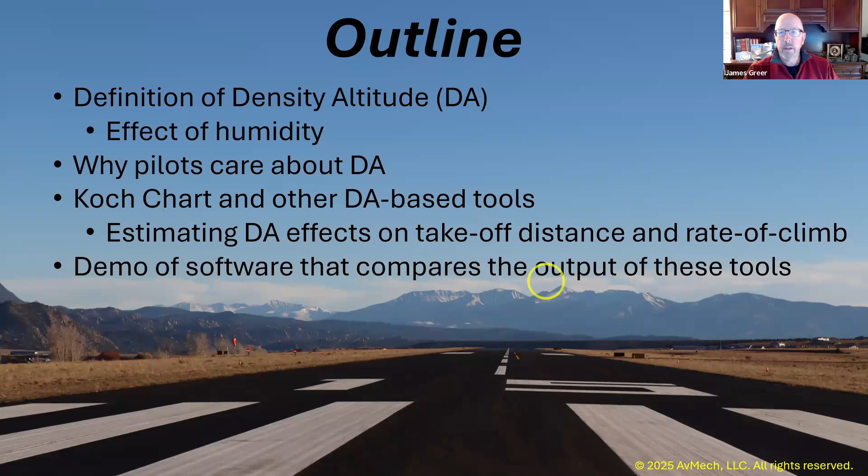So first, a quick review of the types of altitude that you learned when you were studying for your private pilot license. True altitude is your actual altitude above mean sea level. And if you're parked at the airport, it's going to be the airport elevation, provided, of course, that you're parked at the location where they measured the airport elevation. Where I fly, it slopes quite a bit from one end of the airport to the other. So your true altitude might not be airport elevation depending on where you're parked.

The next altitude I want to talk about: if you correct true altitude for non-standard pressure, you can calculate your pressure altitude. The easy way to do this is to just set your altimeter to 29.92 and read it, and that's your pressure altitude. But if you're not in an airplane with an altimeter, you can use this chart the FAA publishes in their Pilot's Handbook of Aeronautical Knowledge, and it'll give you the corrections to get pressure altitude from true altitude.

Most of you probably know that the pressure altitude changes about 1,000 feet for each inch of mercury of altimeter setting. But what we're really interested in finding is the density altitude. And that's what you get when you correct the pressure altitude for non-standard temperature.

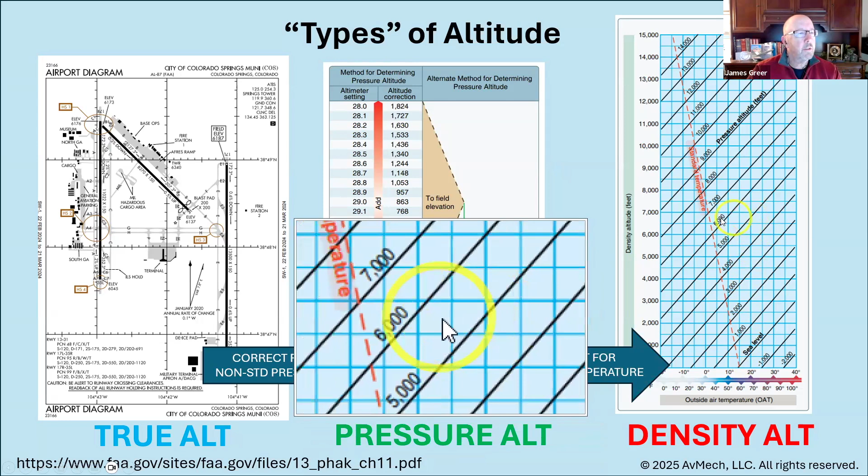And you've probably seen this chart before, but it's also in the Pilot's Handbook of Aeronautical Knowledge. You find your pressure altitude, and then there's this scale at the bottom of this chart of temperature. You find your temperature, your outside temperature, go up to the pressure altitude that you've calculated, and then over to the left axis of this chart and read your density altitude.

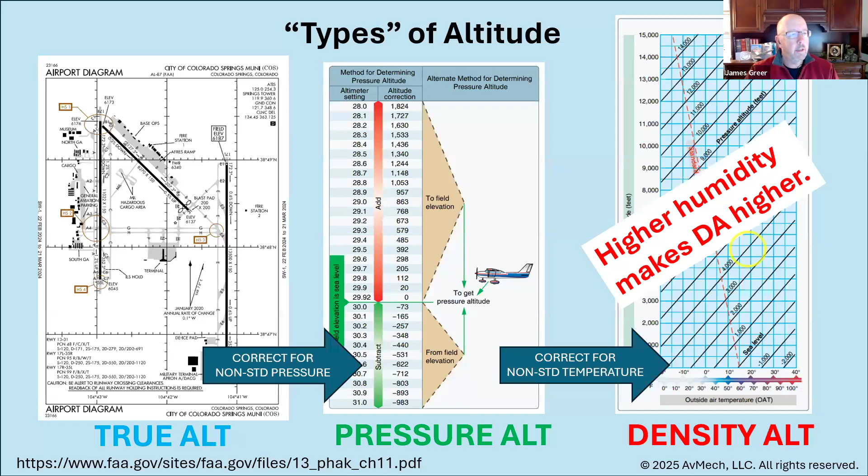Humidity also plays an effect, although this chart doesn't account for that. But higher humidity does make your density altitude higher. The Pilot's Handbook says there's no rule of thumb or chart for calculating the effect of humidity, but that you need to take it into consideration. It says to expect a decrease in overall performance in high humidity.

And while the Handbook of Aeronautical Knowledge says there's no rule of thumb for assessing humidity, there actually is. A couple of guys at Embry-Riddle Aeronautical University in Daytona Beach published a paper back in 2016 where they came up with a simple correction for humidity. It's 20 feet of altitude for every degree C of dew point temperature. So if you're at 20 degrees C dew point, then you'd add 400 feet to your density altitude. So you can see it's not a huge effect, but it's not insignificant.

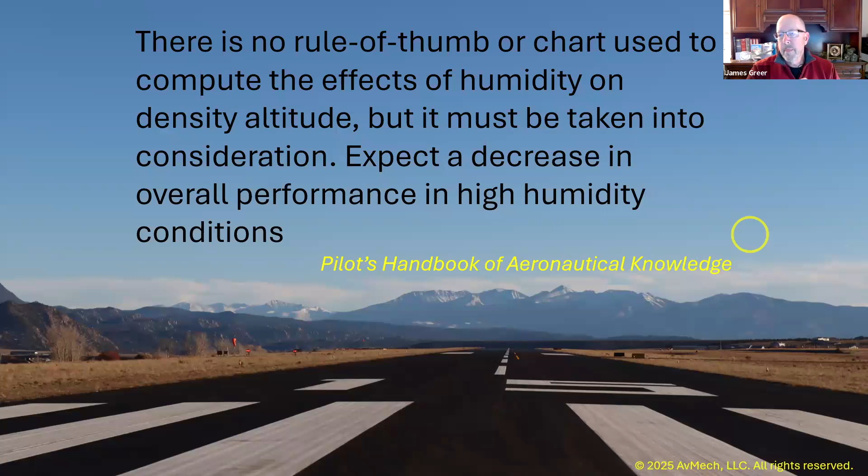But most charts that you use, and if you use your E6B computer, you won't have a humidity correction in there. So this is a picture of the software I'm going to show you later tonight. One of the features of the software is if you plug in a station ID and click Get METAR, you can get this bar chart of the altitudes: true altitude, pressure altitude, dry density altitude, which is density altitude before you correct for humidity, and then the red bar is your density altitude.

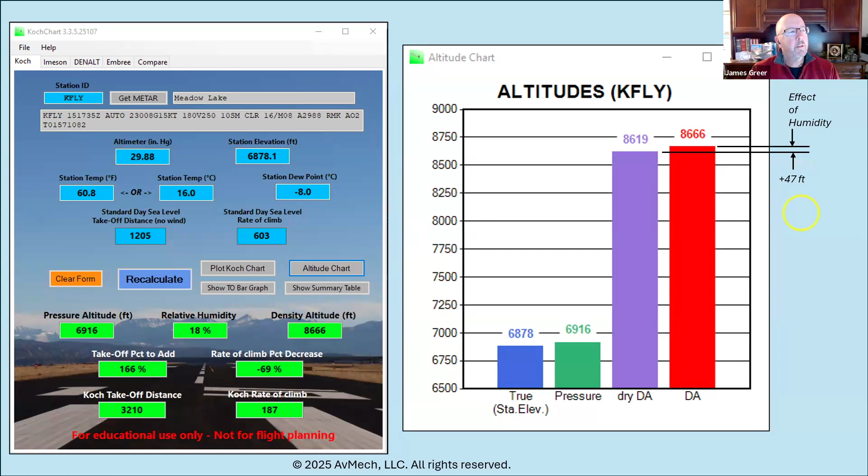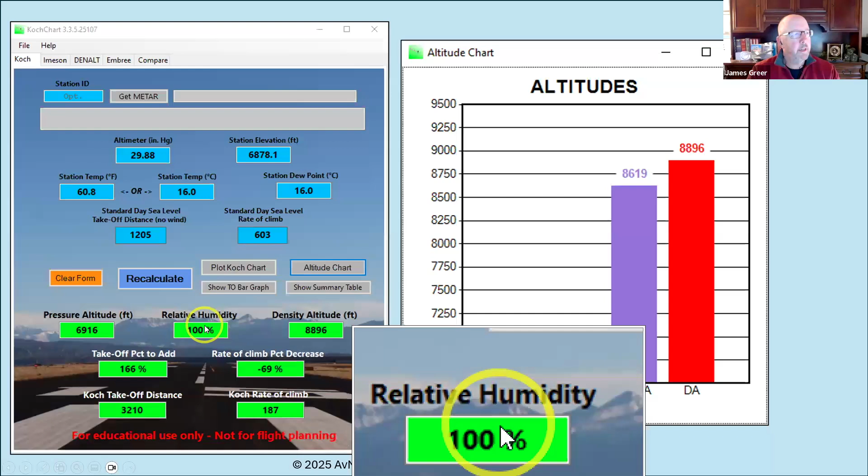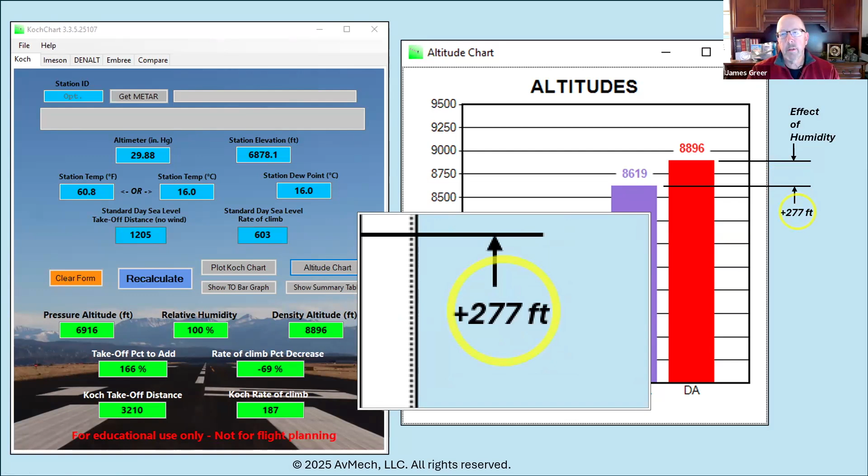And you can see in this case, this was from Meadow Lake Airport, and the humidity here was very low, 18%. And if you look up here to the right, you'll see that the effect of the humidity is only to add 47 feet to your density altitude. Not a huge difference. We can take this same scenario and crank up the dew point to get to 100% relative humidity, which you can see over here. And we can get the maximum effect of humidity for these conditions on the density altitude. And we see here that the effect of humidity is to add about 277 feet to our density altitude.

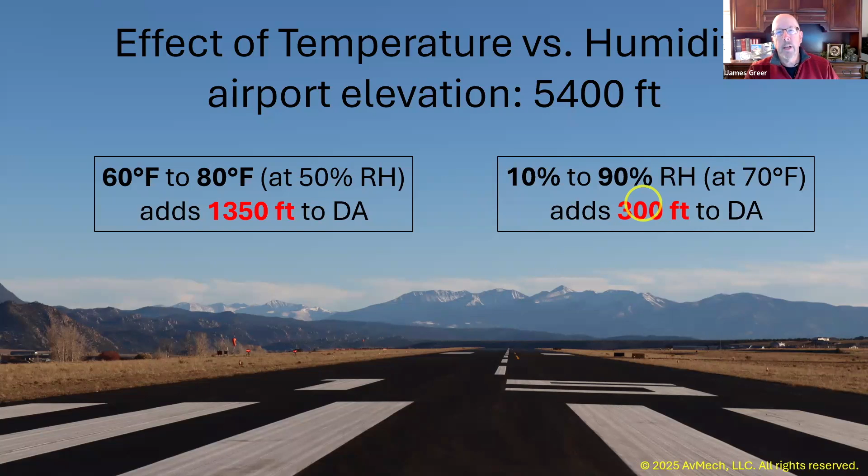And why do we care about density altitude? This again is from the Pilot's Handbook of Aeronautical Knowledge. Density altitude is the altitude the airplane thinks it's at in terms of performance. So regardless of your actual altitude, the aircraft is going to perform as though it were flying or trying to take off from the density altitude.

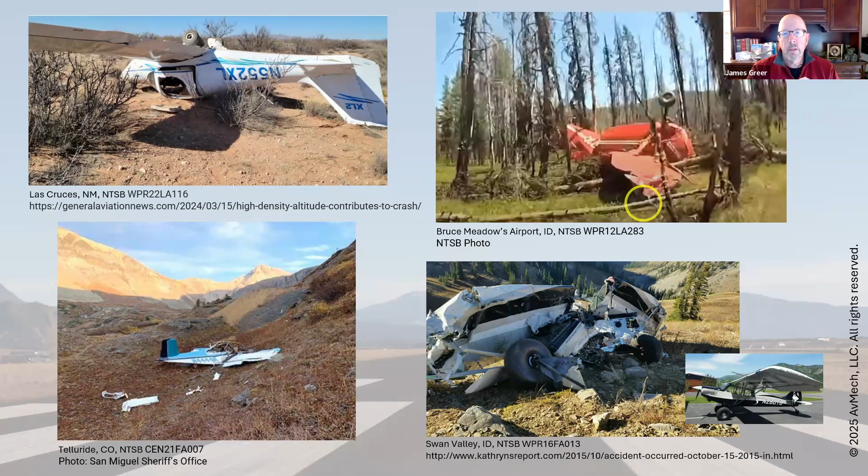And if you do a quick search online of density altitude related incidents and accidents, you'll find a lot of them. These are all cases where density altitude was cited as at least a contributing factor to the accident. Now with cameras and GoPros being everywhere, you can find films of some of these. The one in the upper right, the Bruce Meadow's crash, in which fortunately no one was killed, is a case where they were able to take off, but they just couldn't climb at their flight conditions.

So how do you calculate density altitude? Well, in ground school, you learn how to calculate it on your E6B whiz wheel computer. Of course, there are electronic E6Bs too. I know Sporty's has one, and there are probably others. You can use a formula to estimate it. This formula shown here says to get density altitude, first find your pressure altitude, and then add 120 feet times the difference between your outside air temperature and the standard outside air temperature for your pressure altitude.

So you can see if your outside air temperature is the same as your standard air temperature for your altitude, this whole term goes to zero, and your density altitude will equal your pressure altitude. Whereas if you have a difference in temperature, the higher your outside air temperature, for every degree centigrade higher, you're going to add 120 feet to your pressure altitude.

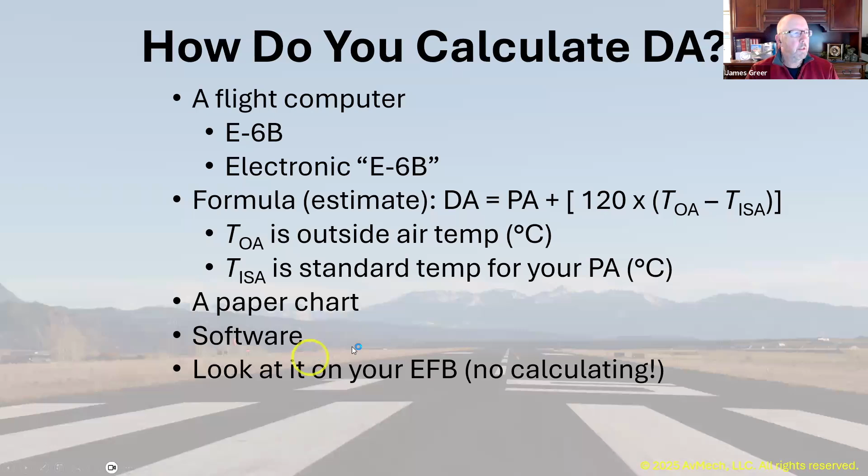You could also use paper charts. We looked at one that's in the Pilot's Handbook of Aeronautical Knowledge. You can use software like I'm going to show you in a few minutes, or you can just look at it in your electronic flight bag if you have something like ForeFlight. If you plug in an airport into ForeFlight, and I assume this is true for other electronic flight bags, although ForeFlight is what I have, it tells you the density altitude right on the screen there.

Okay, so these are the things, and this isn't an exhaustive list, but these are the things that density altitude affects. Some of them for the better, but most of them for the worse. The higher density altitude, the worse your takeoff distance, the worse your propeller is performing, your engine power is lower. Flight pilot physiology, of course, if your density altitude's high enough, you can experience hypoxia, for example.

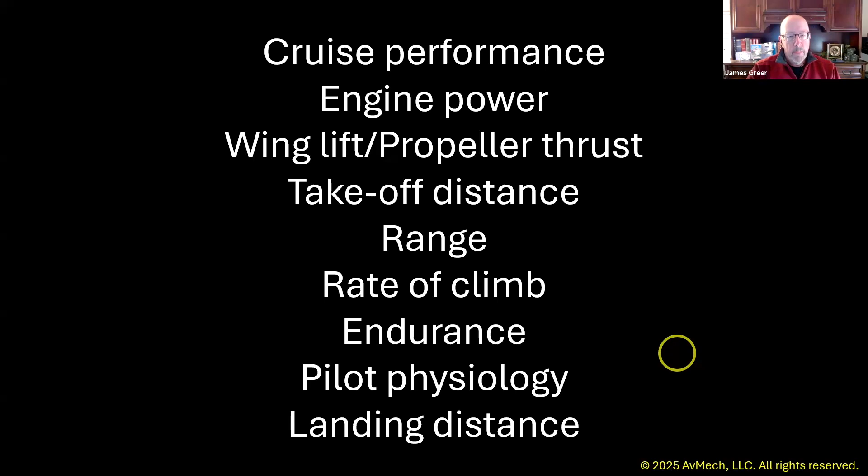But for the rest of this presentation, we're going to focus on two of density altitude's effects, and that's takeoff distance and rate of climb. And we'll start by looking at the Koch chart.

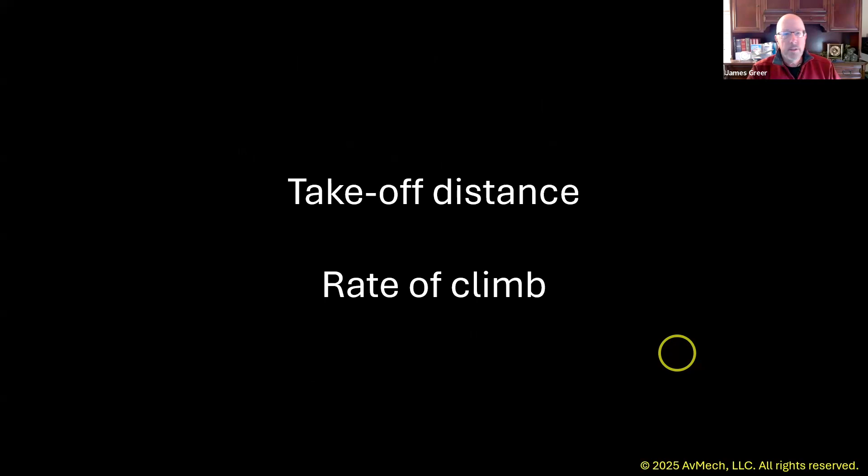The Koch chart is something you may have seen on the counter at your FBO. The FAA still cites it in this FAA pamphlet. It says if you don't have your flight manual or your POH, to use the Koch chart to calculate the approximate temperature and altitude adjustments for aircraft takeoff distance and rate of climb. And it's getting a little bit long in the tooth now. This is a 2008 publication, but it's still available on both the FAA and the NTSB's websites.

This is what the Koch chart looks like. It's called a nomograph. It's got three vertical axes on it, as you can see. And the way it works is you plot your outdoor air temperature, your station temperature in degrees Fahrenheit on the left axis. You put a point at your pressure altitude on the right axis. And again, you find your pressure altitude most easily by setting your altimeter to 29.92. And you connect those 2 points with a straight line. And where it crosses the third axis of the nomograph, that gives you the information we're looking for.

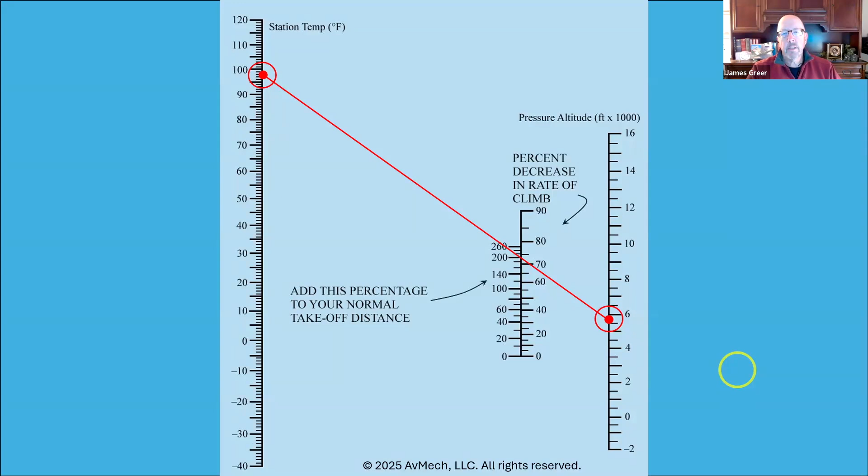It tells you how much distance to add to your normal takeoff distance, and normal means at your current aircraft weight under standard temperature and pressure conditions at sea level. And it also calculates the decrease in your rate of climb. So in this particular case, it's telling us to add 200% to our takeoff distance and to decrease our rate of climb by 73%.

So how did the Koch chart come up with these particular numbers? I'm not sure. What I've been able to dig up is the earliest Koch chart I found was in a 1950s Army helicopter flight manual. But another source I saw said it was developed in the 30s by Dr. Koch over in Germany.

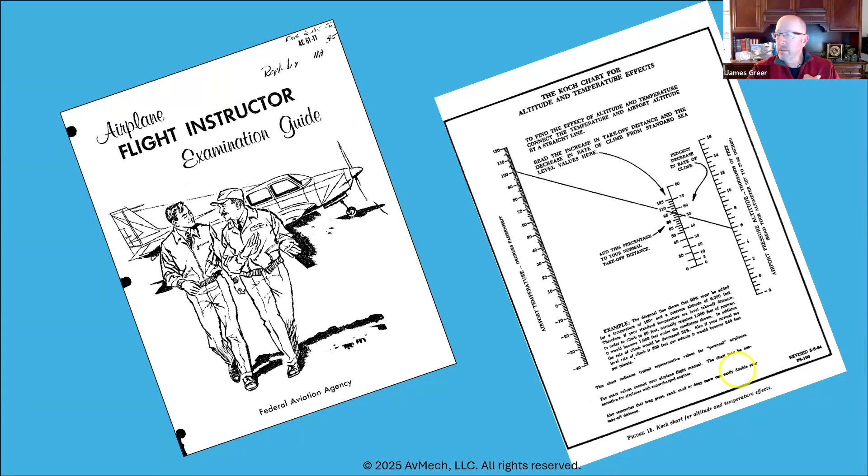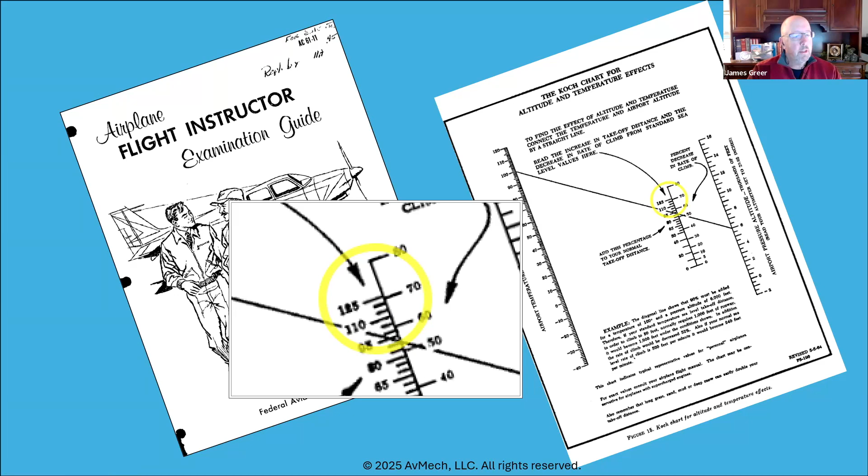Here's where it first appeared, at least where I first saw it in FAA publications. Back in 1964-65, they published the Koch chart in this flight instructor exam guide, and it's hard to read. I'm going to zoom in on it. Maybe you'll be able to see here, but you'll notice the top of the Koch chart here says add 125% to your takeoff distance. That's different than today's Koch chart, and in fact, they rescinded this one, and in 1967 published a revised one. And that's the one that's available today.

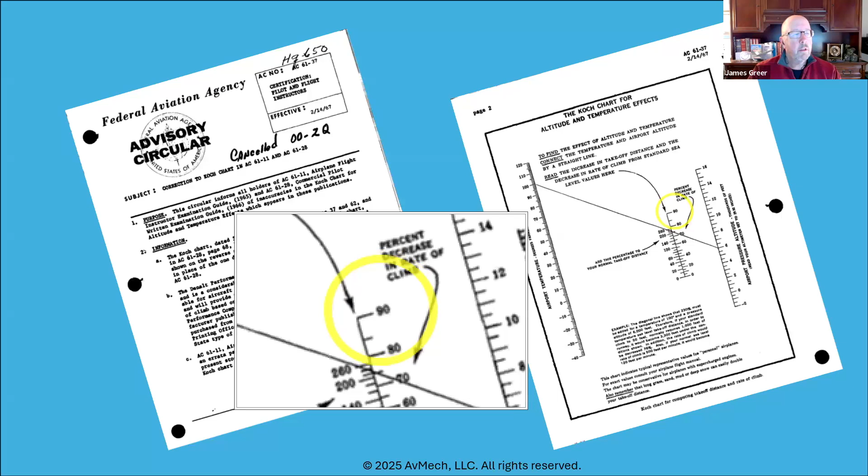It goes up to 260% addition to your takeoff run and 90% decrease in your climb rate. This one came out, like I said, in around 67. And if you find a Koch chart today, that's the one you'll see. So somebody decided in the late 60s that Dr. Koch's correction factors weren't conservative enough.

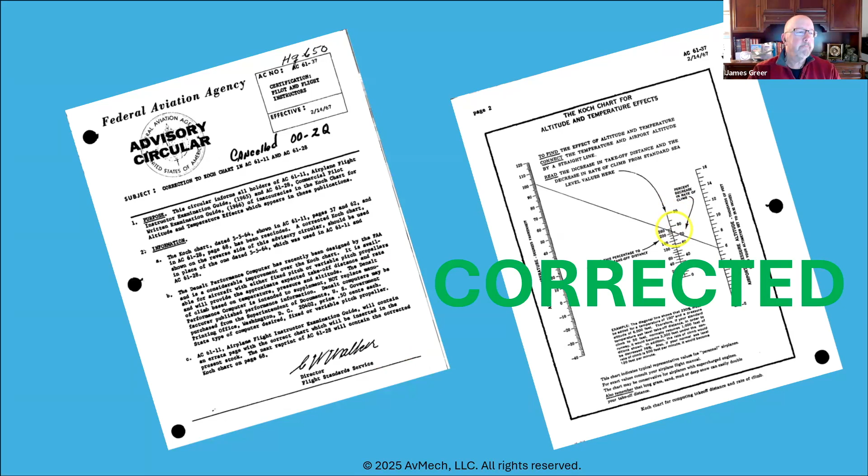At the same time the FAA published that revision, they also came out with this whiz-wheel computer called the Denalt computer. And Denalt is a contraction for density altitude. This version, as you can read on the rim of the computer, is for variable pitch propellers, but they also issued one for fixed pitch propellers. And there's a new version of this that's available today that I'll show you in a couple of slides. But this is another way to assess the effect of density altitude on your takeoff and rate of climb.

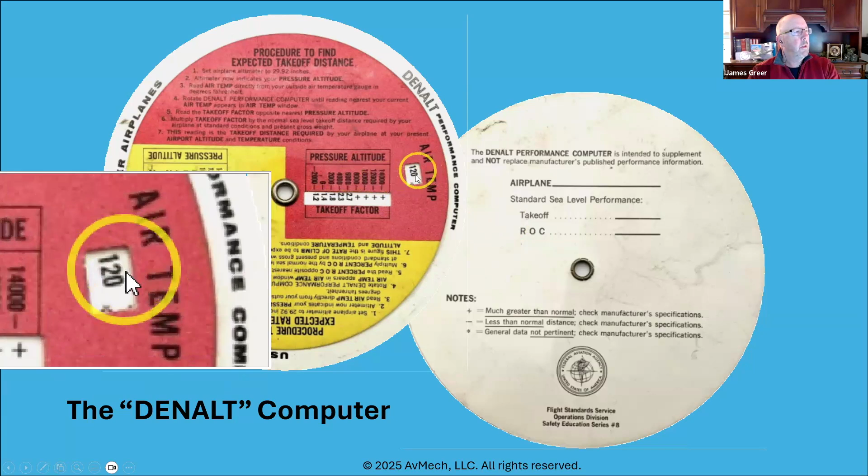And you can see up here is the pressure altitude window. Over here is the air temperature window. So you put your air temperature in this window. You look along here for your pressure altitude, and it says, for example, multiply your takeoff distance by 2.7 in this case.

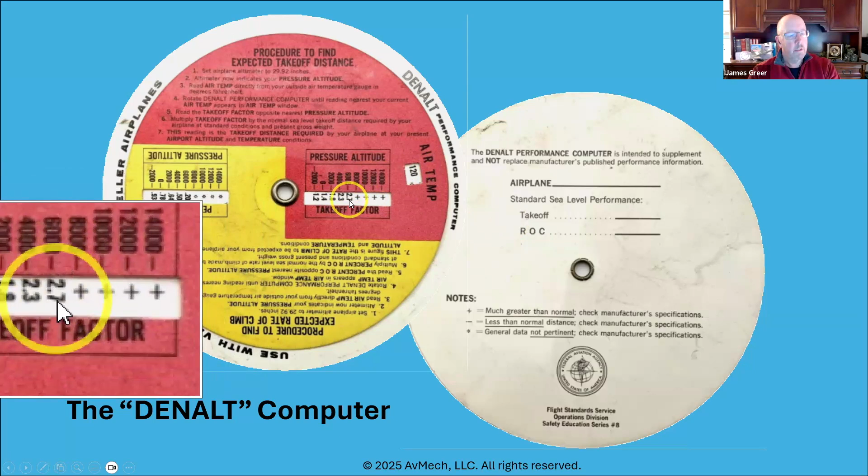So the Koch chart, it turns out, while it does show you what to add to your takeoff distance and percent decrease in rate of climb, my suspicion is it really started as a density altitude calculator. And let me show you what I mean by that.

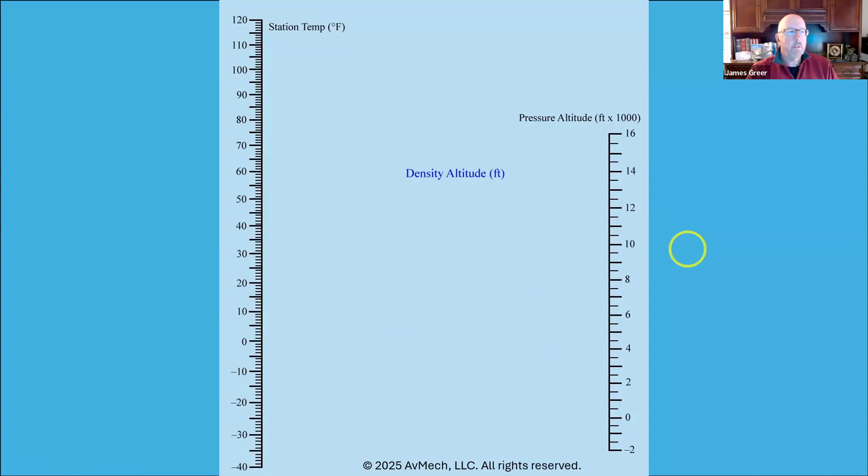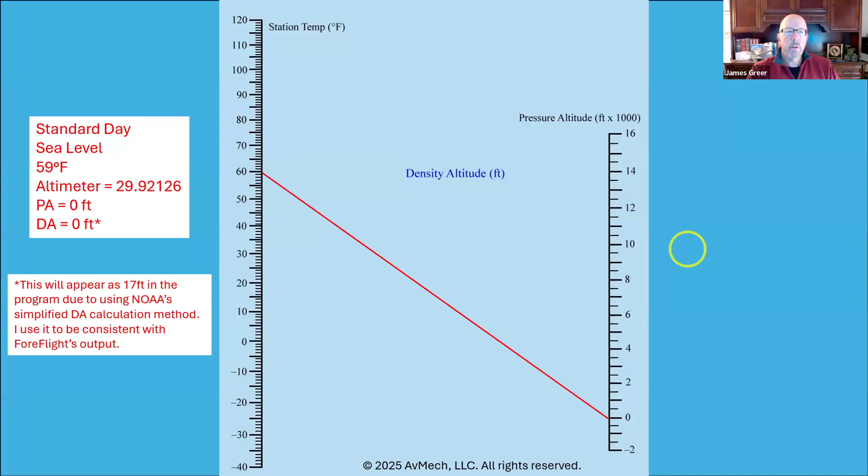If we pick conditions that result in zero density altitude, like standard day sea level, and put that on our chart, and then find another condition that also results in a zero density altitude, for example, a cold day in Wichita, when we see where those lines cross, we can add a scale on here and call that zero. And we can do that for a bunch of conditions and see where we end up as far as a density altitude scale.

And it turns out that if you, for example, here's Meadow Lake Airport on an 82-degree day with a certain altimeter setting, it gives you a 10,000 foot density altitude, and you can calculate that a number of ways,

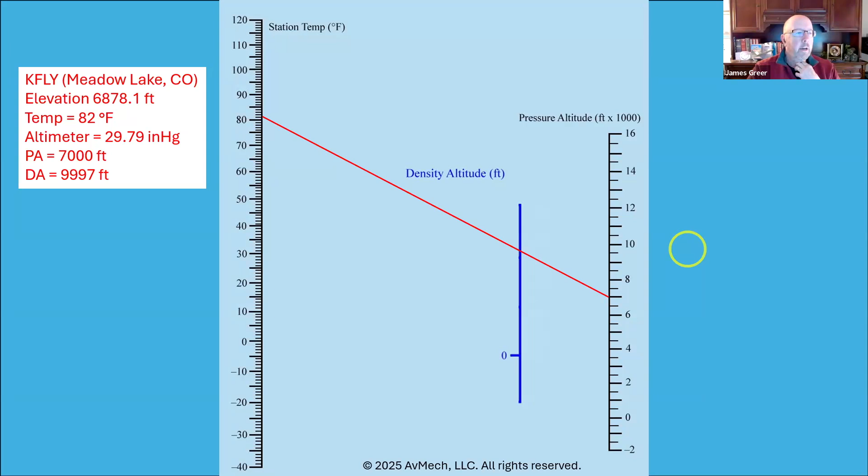Let's find another place with a 10,000 foot density altitude. Here's a cool day in Lake County Airport in Leadville, Colorado, 27 degrees. Their airport elevation is almost 10,000 feet, the highest airport in North America, as far as I know. We can put another tick mark there and call that 10,000.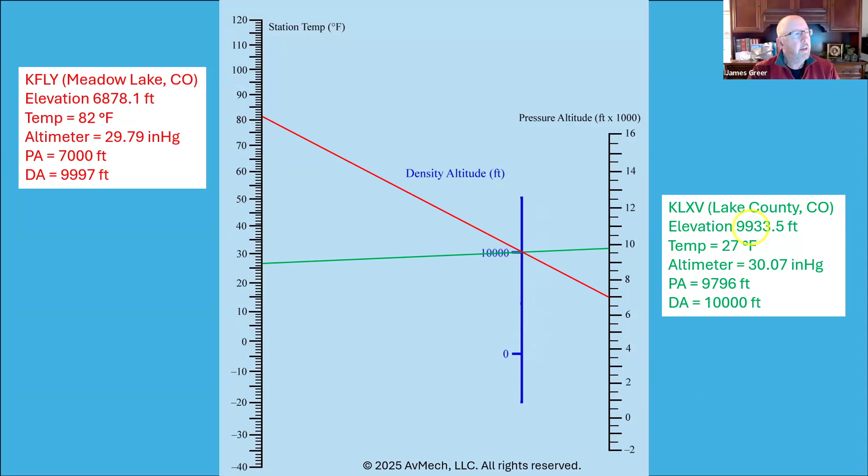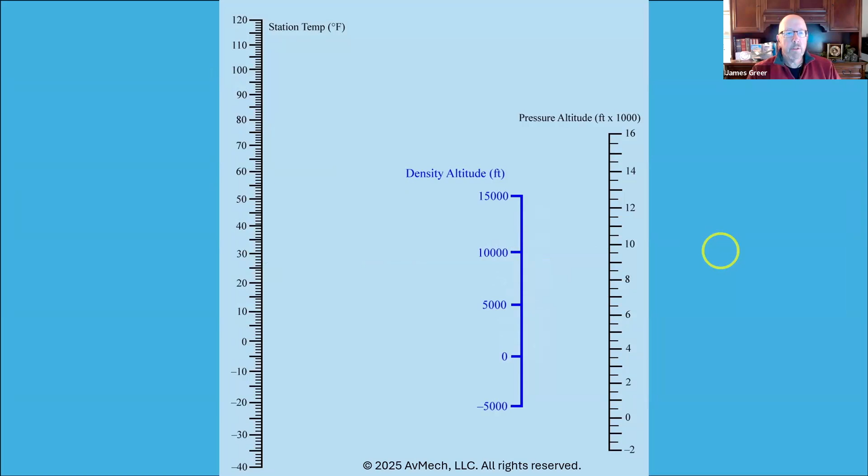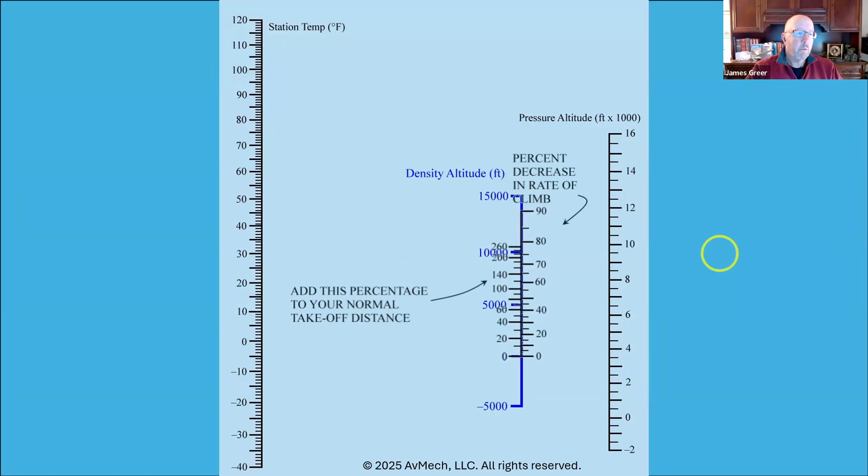And if you do this enough times, you figure out that this scale actually is a very linear, evenly spaced density altitude scale. So what this nomograph is doing in the background is calculating your density altitude, and what Dr. Koch did and what the FAA later revised was to try to put numbers on there that connect the density altitude to the effect on your takeoff distance and rate of climb.

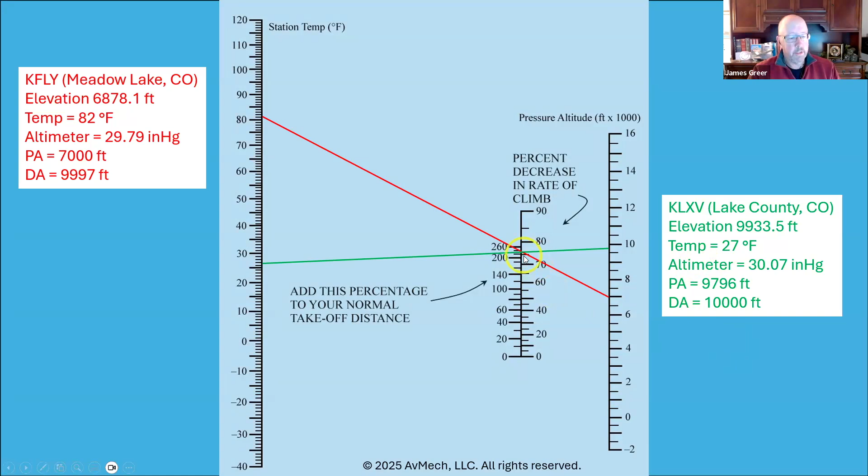So these are the conditions I showed before for 10,000 foot density altitude. You can see the chart is telling us to add somewhere between 230 and 240% to our takeoff roll, and to decrease our rate of climb by something a little over 75%. And those numbers you can see here.

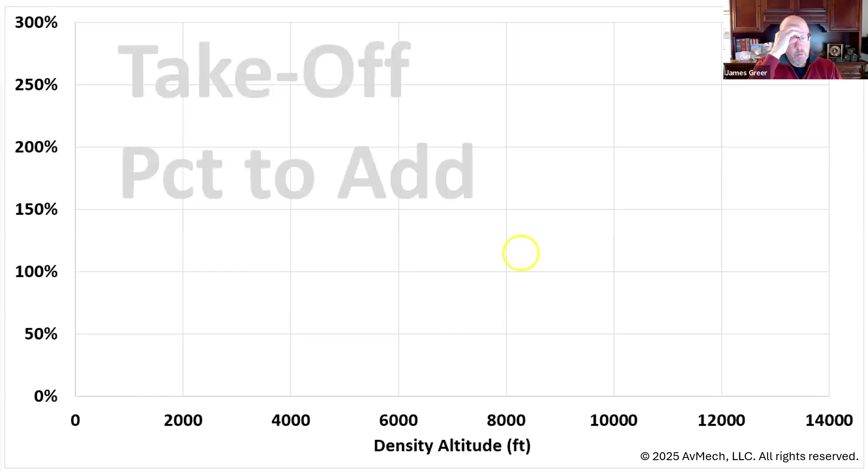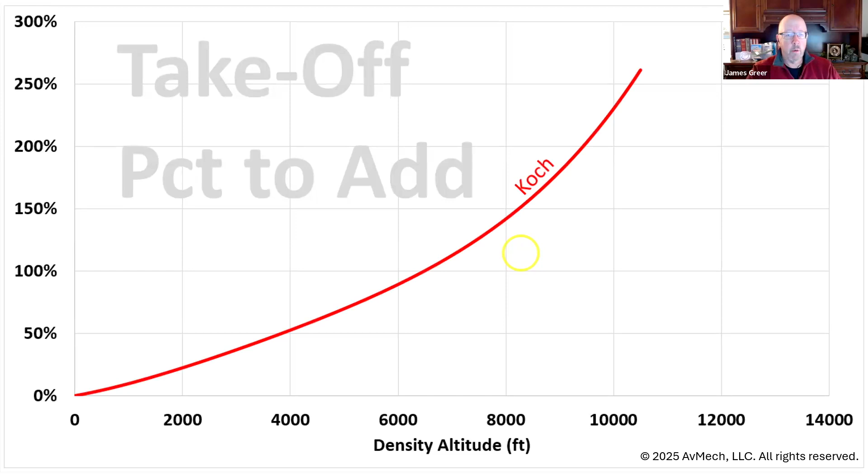What we can do is take those numbers off Koch's chart and plot them against density altitude, and we get a curve that looks like this. This is how much you're supposed to add to your takeoff distance for a given density altitude. But as I mentioned before, the Koch chart is not the only way people have estimated the effect of density altitude.

So let's look at 3 other methods that have been used to estimate the effect of density altitude on takeoff and rate of climb. You may have heard of Sparky Imeson. He wrote a book called The Mountain Flying Bible, and in that book he has some rules of thumb for the impact of density altitude on your takeoff performance.

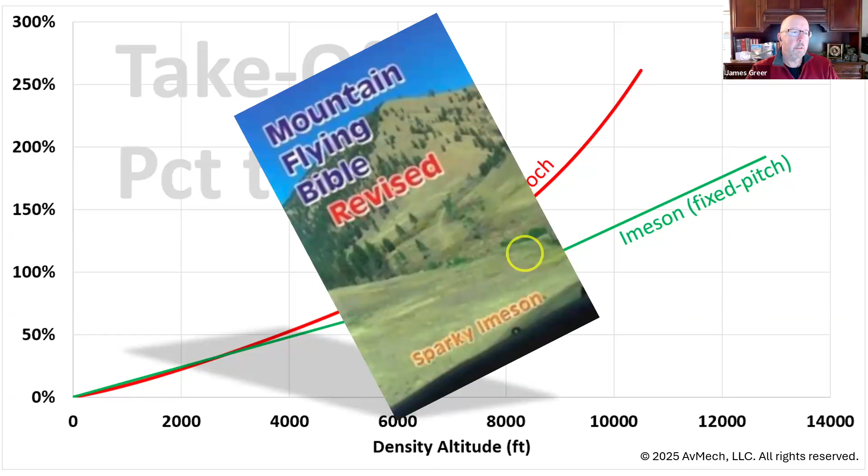This green line represents his rule of thumb, which is to add 12% to your takeoff roll for every 1,000 feet of density altitude. And then once you get past 8,000 feet of density altitude, you add 20% to your takeoff roll for every 1,000 feet. And that's why there's a bend in this line right here at 8,000. You can see it's not quite as conservative as the Koch chart would be. The Koch chart penalizes you more than the Imeson rule of thumb.

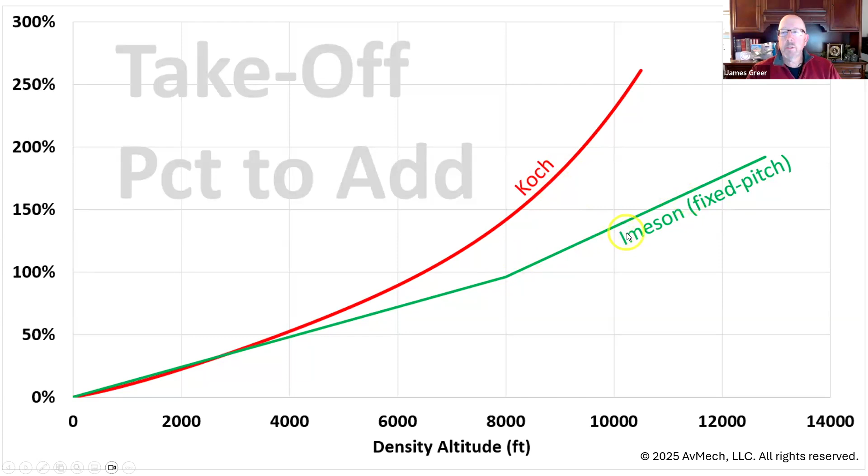And Imeson had rules for both fixed pitch propeller airplanes and variable pitch propeller airplanes. And I should say that this is all normally aspirated airplanes, not turbocharged airplanes. You'll notice that for a variable pitch propeller or a constant speed prop, the penalty's not as bad. That's because with a variable pitch prop, obviously you can change the pitch to take a bigger bite out of the thinner air, and it doesn't suffer as much as a fixed pitch propeller airplane does from the increase in density altitude.

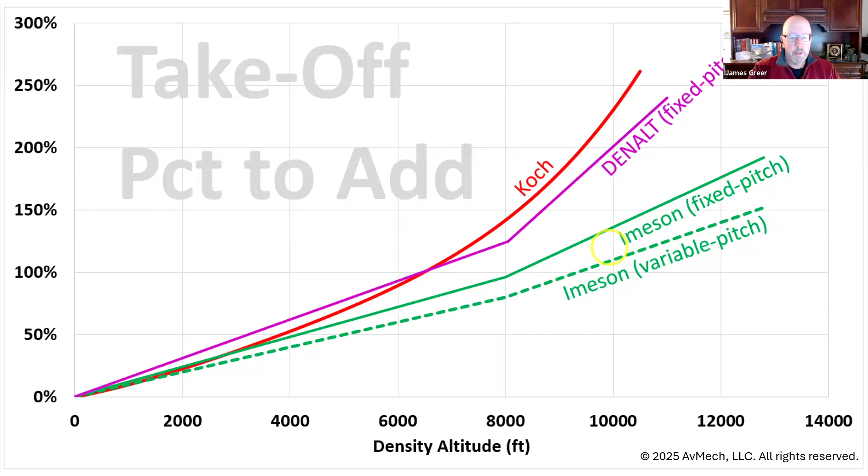This purple line is taking all the points off the Denalt computer that I showed you earlier and plotting a curve based on those points. This is what the more modern version of that computer looks like. It has scales for both variable pitch propellers and fixed pitch propeller airplanes on the same device. This one happened to be made in 1991 by a contractor in California. So at some point, the FAA handed this computer off to somebody else.

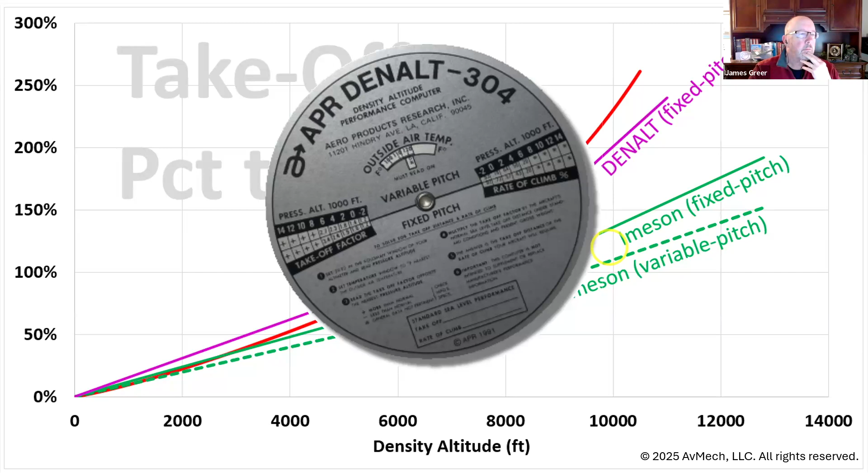And like with Imeson, Denalt has the variable pitch curve as well. And as you can see, once again, the variable pitch propeller airplane is not as badly affected as the fixed pitch propeller plane. And the Denalt computer gives you more conservative effects than Imeson's rules of thumb, but less, except at lower altitudes, than the Koch chart does.

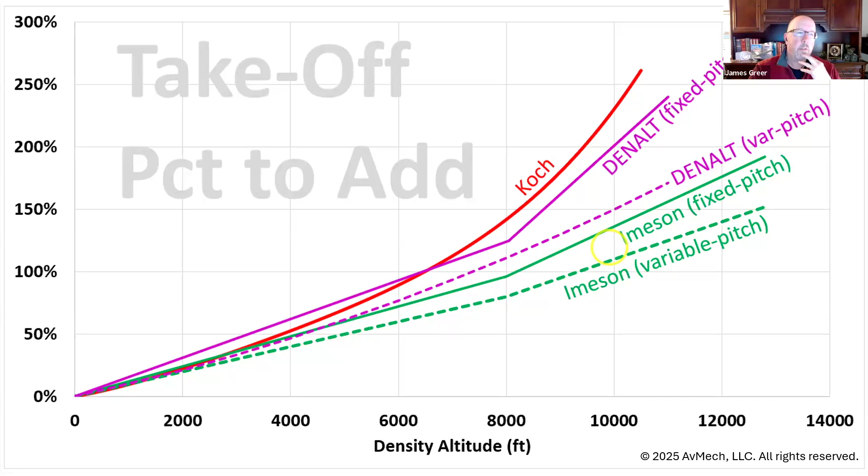And finally, James Embree wrote a book in 1984 called Axioms of Flight. In that book, he came up with a whole bunch of rules of thumb for many things beyond takeoff and rate of climb, but he does have rules of thumb in there for takeoff and rate of climb. This orange line here is for the fixed pitch propeller airplanes, and this dotted line for variable pitch propeller airplanes. And you can see they kind of fall in the same neighborhood as the Denalt estimates do.

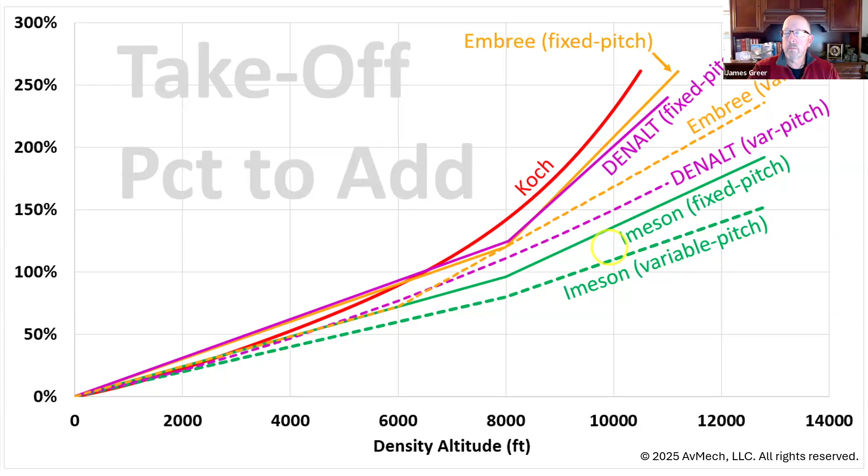So these are all rules of thumb and estimates. Let's compare them to some actual flight manual data. I'll throw on there some data from a Cessna 172 handbook. And if we isolate those points against the Imeson fixed pitch, because this is a fixed pitch propeller airplane, we see that it matches pretty well to the Imeson curve.

We can throw on these magenta circles for the Piper Cherokee Warrior 2. And we see that they happen to match the Denalt and the Embree curves. It makes me wonder if maybe Piper, for the purposes of their manual, used an analytical solution rather than a flight test, because those points are just perfectly on that 15% slope line.

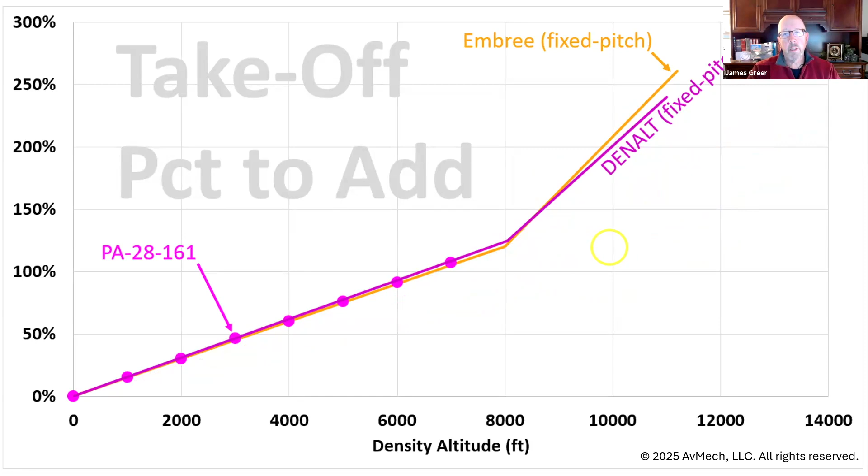And finally, let's add some data points from a variable pitch propeller airplane. These blue triangles are for the Cessna 182. And they match the Imeson variable pitch pretty well.

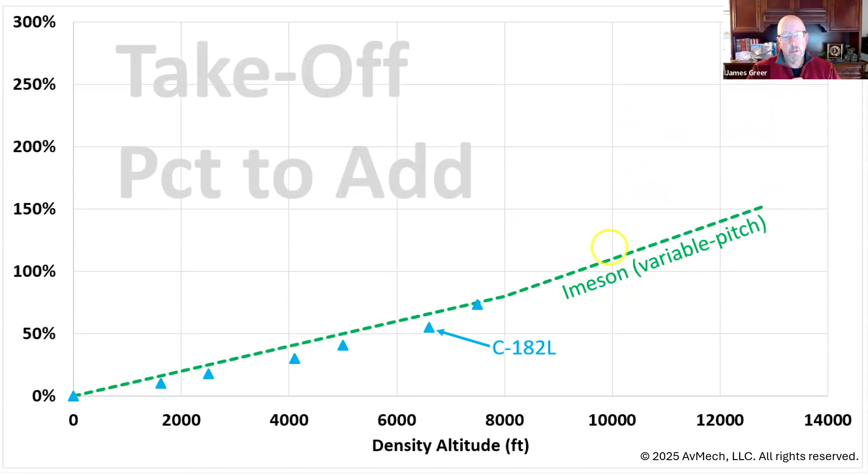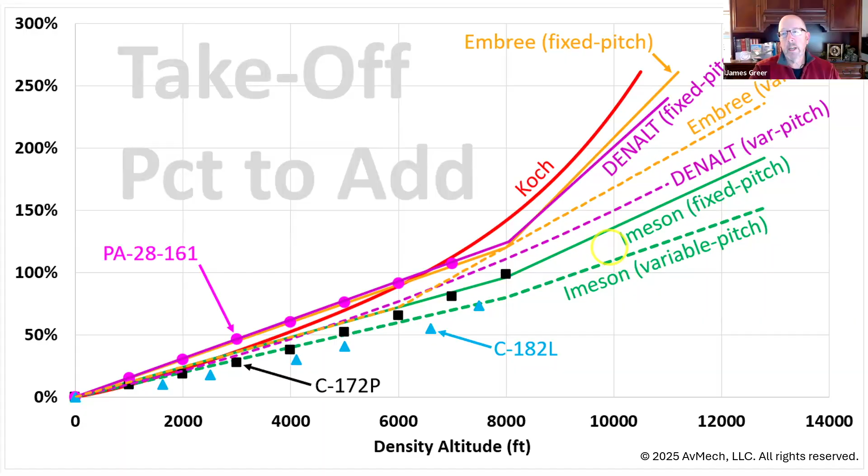And I suspect that most of these rules of thumb, the way these different authors and sources came up with them, had a lot to do with the airplanes they were flying at the time, because they're all a little bit different, except for Denalt and the Embree fixed pitch curve. They don't fall on top of each other very well. But these are 4 of the tools that people have used to try to get a handle on the impact of increasing density altitude on your takeoff and rate of climb performance.

We didn't talk much about rate of climb, and I'm not going to go into the same level of detail here, but I will show you what those curves look like. Here's how Koch says density altitude affects your rate of climb. At least I should caveat that and say it's Koch as revised by the FAA in the late 60s. Embree and Imeson both use the same rule of thumb for their effects for both fixed pitch and variable pitch propeller aircraft.

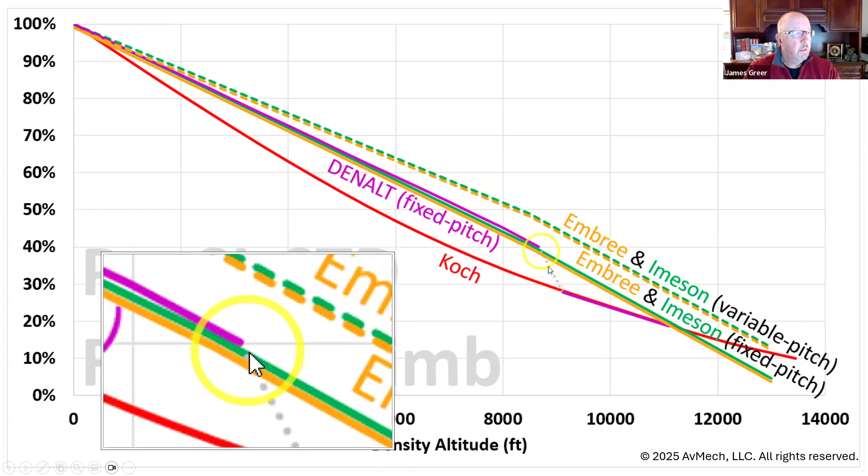Denalt follows the Embree and Imeson line until about 8,500 feet. And then if you plot all the points that are available on that flight computer, there's this kind of strange gap right here where these gray dotted lines are. I guess the authors of that device decided that once you get above about 8,500 feet, you really need to take a bigger penalty on rate of climb. So it jumps down to something like the Koch curve here.

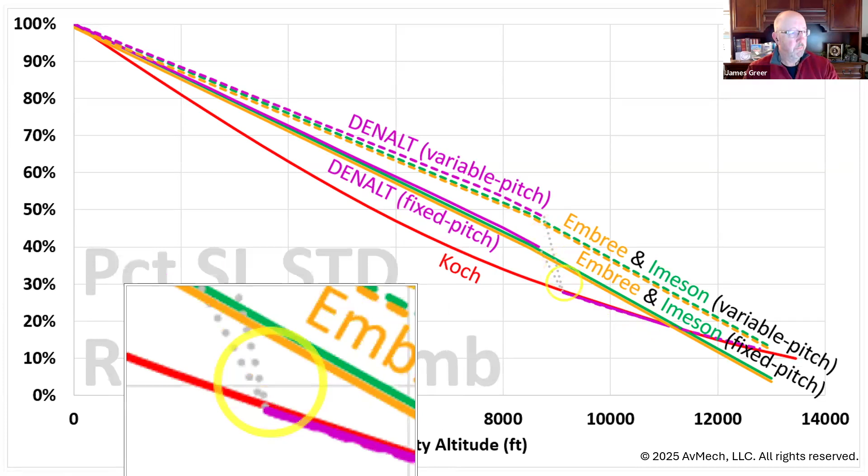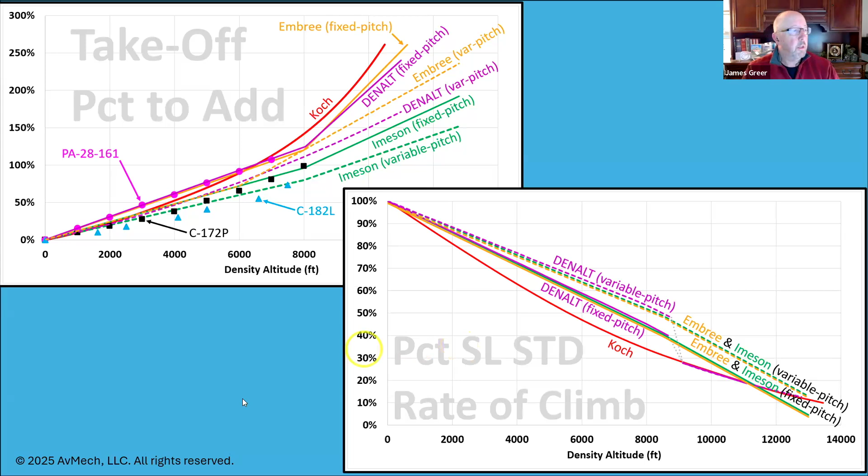And that's true for the variable pitch propeller case as well. You can see there's this jump here in the line as you pass through about 8,500 feet. So that's the effect of density altitude on rate of climb by these 4 different sources. These are just both of those charts on the same page, and they're available in the software I'm about to show you. And I'm going to get to that next.

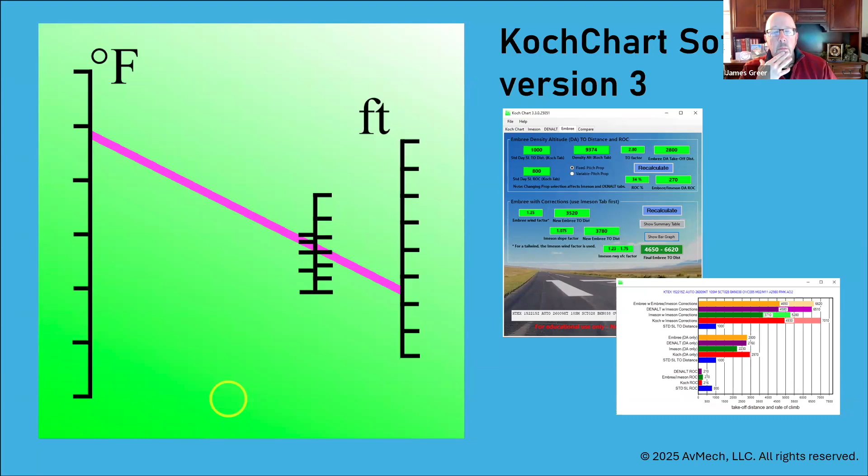But before I pull up the software, I would like to just give you a little preview of some of the things you're going to see in it that might be hard to see in the actual demo.

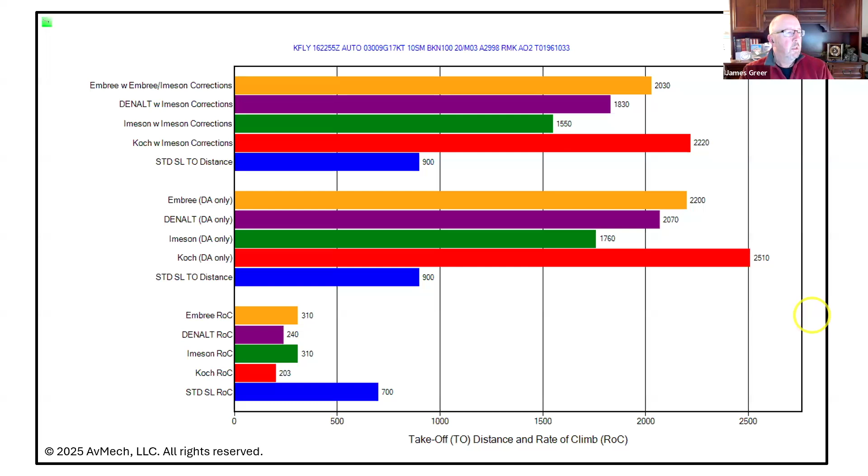So this is what the software interface looks like, and it pops out a Koch chart really quick once you put in your airport identification. And this is a bar chart that it will show you. At the bottom of the bar chart is the rate of climb performance. At the very bottom, the blue bar is what you put in for your standard day sea level performance. And then the other colored bars are the rules of thumb and the Koch chart application based on the density altitude. So you can see in this case, a 700-foot rate of climb at sea level becomes 310 according to the Embree rules.

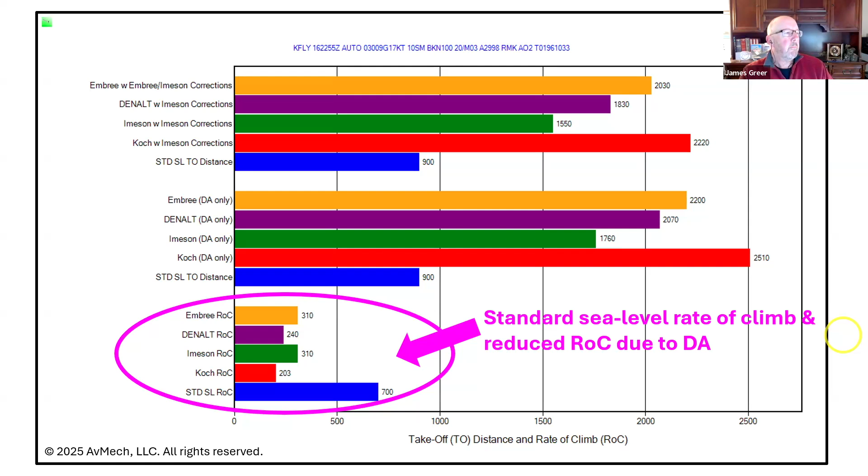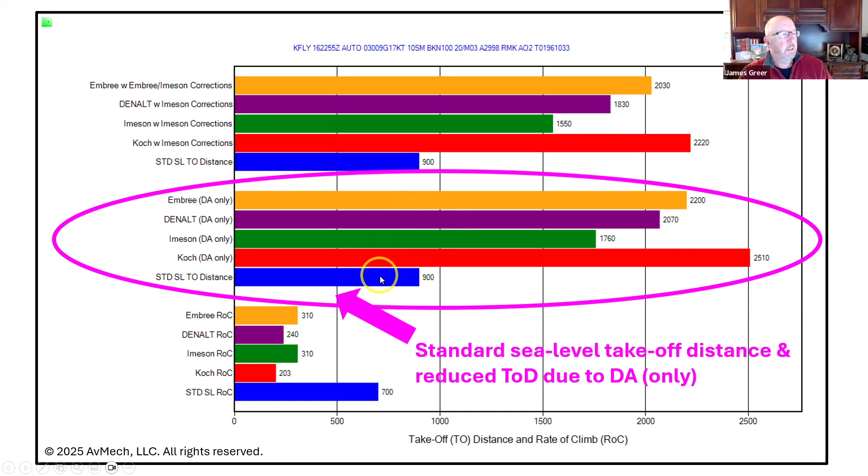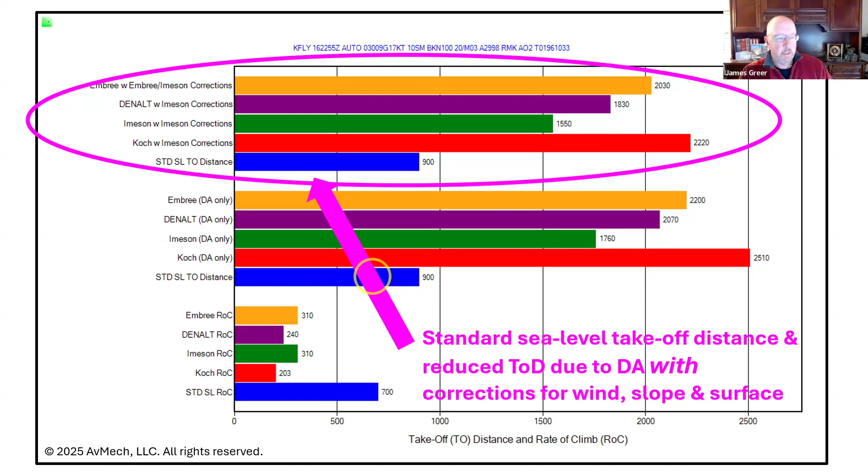The next set of bars is takeoff distance corrected for density altitude. So the blue bar, once again, is what you put in for your standard day sea level performance. And these other bars are the rules of thumb being applied to that 900 foot, in this case, takeoff distance. And then finally, the top set of bars will apply corrections for wind, runway slope, and runway surface if you put in that information. So with that, I'm going to jump over to the software.

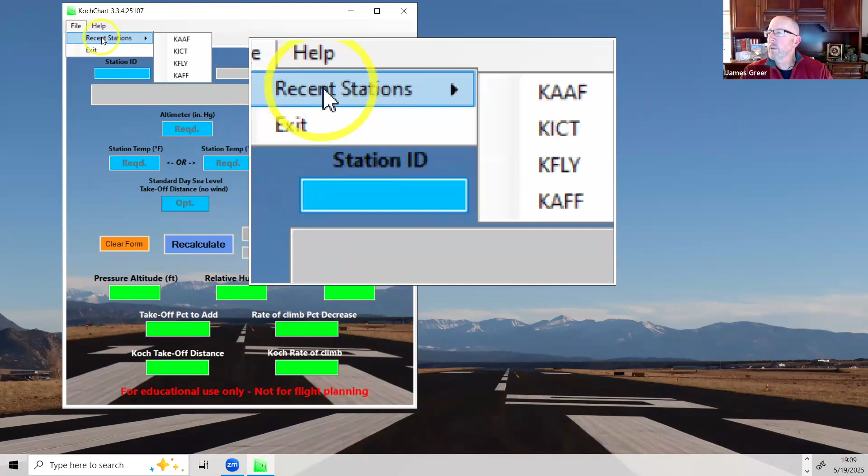Now, just by way of introduction, this has a typical Windows file menu at the top. The file menu includes recent stations you may have looked at with this program, of course, an exit button. There's a help menu, and the help menu has an about page, a check for updates button, because the software does get updated with new information occasionally and bug fixes. And then a link to that Koch Chart video on YouTube that I also put the link up in the comments.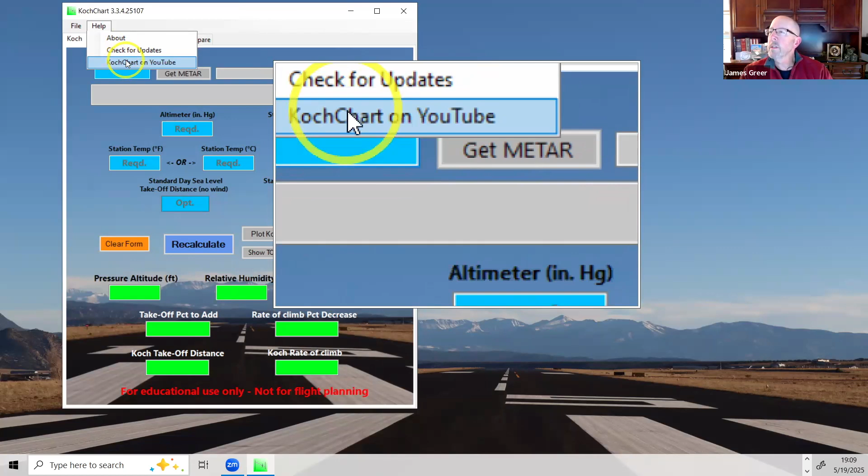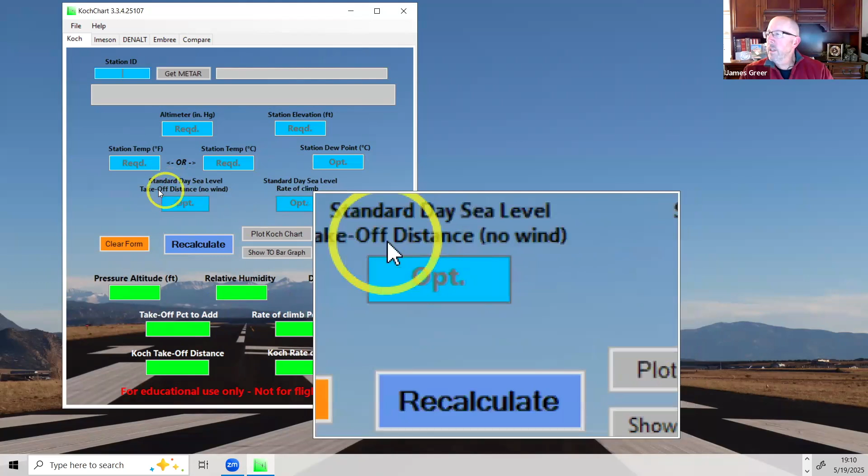So the easiest way to use this software is first to put in your standard day sea level performance. By the way, blue windows in this software are inputs. Green windows in general are output from the program. So once you fill in blue windows, you get filled in green windows. Anyway, back to what I said would be the first thing to do: your standard day sea level takeoff distance and your standard day sea level rate of climb.

So I'm going to pretend I've got my POH here and it says on a standard day at sea level, and I'm going to fill my plane up to gross weight even though it's a really hot day, because I'm not being very smart, and it says the takeoff distance is 1,000 feet. So I'll put 1,000 feet in here. It also says my standard day rate of climb is 750 feet per minute.

Okay, now I'm ready to either manually fill in all these numbers up here, my altimeter, station elevation, temperature, and dew point, or I can just go up here to station ID, put in my airport, I'll put in KFLY, and click Get METAR. And it goes out and retrieves the METAR for Meadow Lake. It fills in all the information I need, altimeter, station elevation, temperature, and dew point.

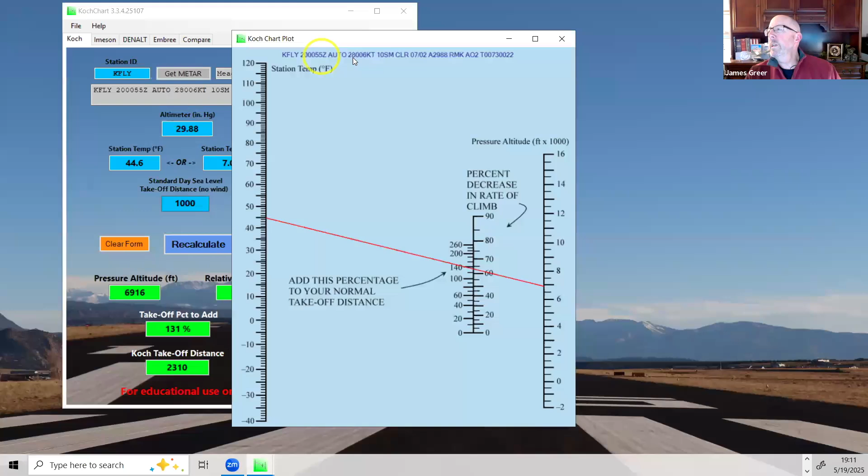And I can go down here and I can plot a Koch chart just by clicking on the Koch chart button. And you can see at the top of the chart, it tells me what airport this is for. It just repeats the METAR at the top here, because you could also get another nearby airport, say the Air Force Academy, and plot that Koch chart. And you would know which Koch chart is which by the heading at the top of the Koch chart.

And you'll also notice that down at the bottom of the page here, we have calculated now our pressure altitude based on the altimeter, our relative humidity based on temperature and dew point, our density altitude, which is based on pressure altitude, temperature, and humidity. And then since we put in our standard day performance, it tells us our new Koch takeoff distance and our new Koch rate of climb.

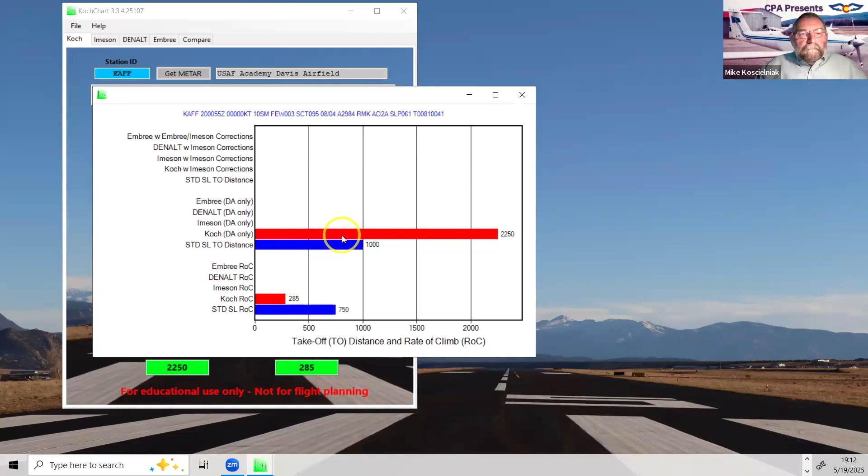And we can see that in bar graph form if we click this button, Show Takeoff Bar Graph. The blue bars are our sea level performance. The red bars are the Koch numbers based on the Koch chart. If we didn't put in our standard day sea level numbers, we wouldn't get the red bars because it doesn't know what to multiply those factors by.

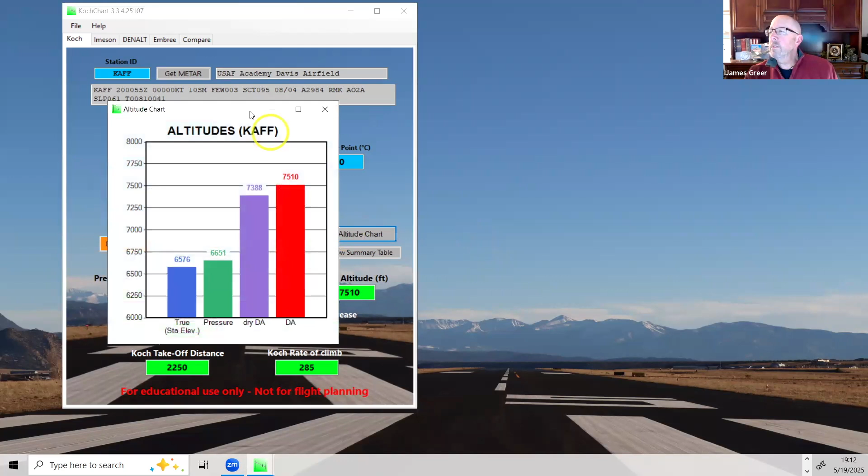The other thing you could do, if you just like to look at what your different altitudes are, you can click altitude chart and it will show you your true altitude, which is just your station elevation. It will correct that for pressure and give you your pressure altitude. In this case, you can see the pressure altitude's higher than true altitude because the altimeter setting is less than 29.92, which is standard altimeter setting.

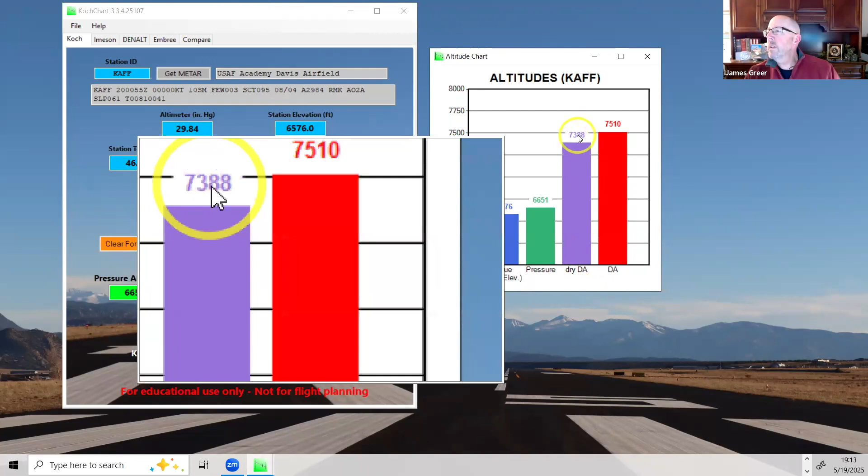It gives you your dry density altitude, in this case 7,388, which does not account for humidity. And given our 76% humidity right now, it gives us our actual density altitude, which is 7,510 feet. So the humidity is changing our density altitude by 130 feet or so. Not much. So that's what the Koch chart tab will do for you.

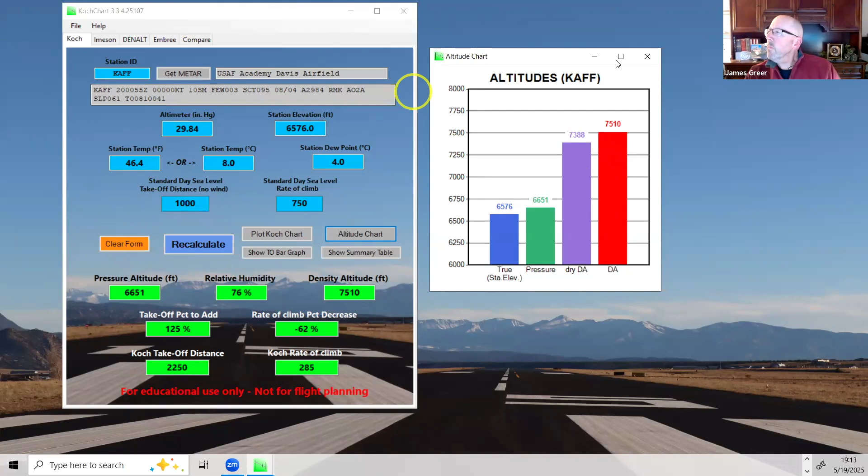The next tab I'd like to show you is the Imeson tab. We can get the Imeson takeoff distance and the Imeson rate of climb just by touching this calculate button here. But we need to decide if we want the fixed pitch number or the variable pitch numbers. And that, of course, would depend on your airplane. I'm going to choose variable pitch propeller and click calculate.

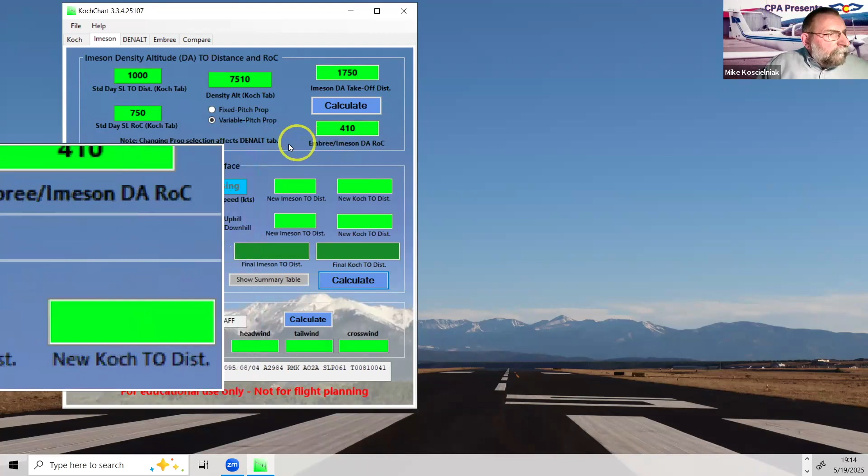So now I have the Imeson takeoff distance and the Imeson rate of climb. It says Embree / Imeson because if you recall, they both use the same rule of thumb. And if I click on my show takeoff bar graph, now I have these green bars, which are for Imeson. They've been added to the bar graph.

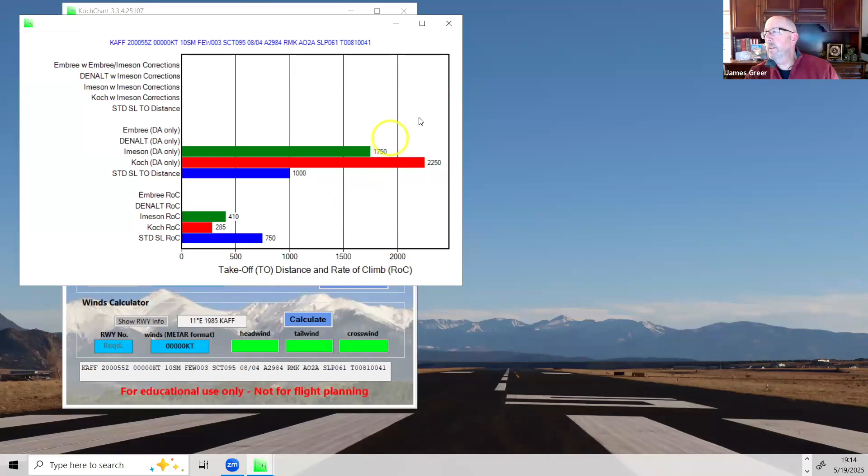Excuse me. I mentioned that you can correct these numbers for wind, for runway slope, and for runway surface. So let's go ahead and do that now. I am going to go back to my Koch tab and change my airport back to KFLY.

And then go back to my Imeson chart, recalculate my Imeson numbers. And now let's correct for these different things I talked about: wind, slope, and surface. There is at the bottom of this page a wind calculator. So it allows you to calculate your headwind component very quickly based on the information from the METAR, which is reproduced at the bottom of the page down here.

Notice that our wind is from 280 at 6 knots, which is true. I don't mean that's true. I mean it's true heading, true course actually. Given our variation, which the program has automatically pulled up from an FAA database, of 7 degrees east, that gives us our magnetic winds of 273 at 6. And then we can pick a runway to use and it'll calculate the wind components.

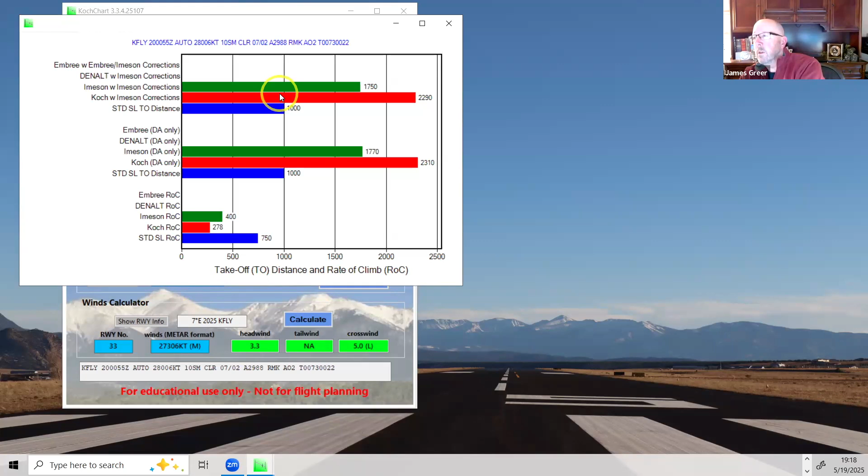If we look at our bar graph, now we have these bars up here for the corrected values based not only on density altitude, but also wind, slope, and runway surface. And really, we've done everything hard that you have to do in the program, because the most time consuming part is the wind, slope, and surface, if you even want to correct for those. Now we can look at the Denalt and Embree corrections, but they use the numbers we've already put in, so there's no more calculating to be done.

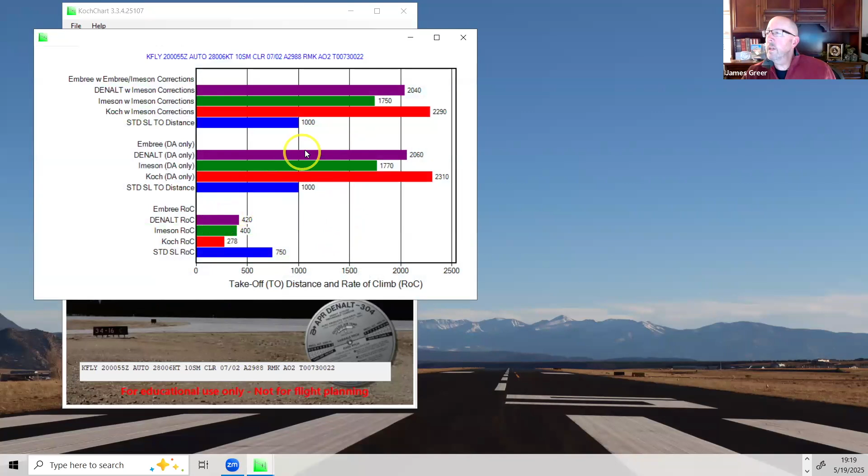If we click on the Denalt tab, it takes us to this tab, and you can see everything's filled in. And if we click on our bar graph, you can see now we have these purple bars for rate of climb and takeoff distance, and those are from the Denalt computer. Similarly, we can go to the Embree tab. We find that that's fully populated with all the information we already put in. We can pull up our bar graph, and now we have the orange bars added.

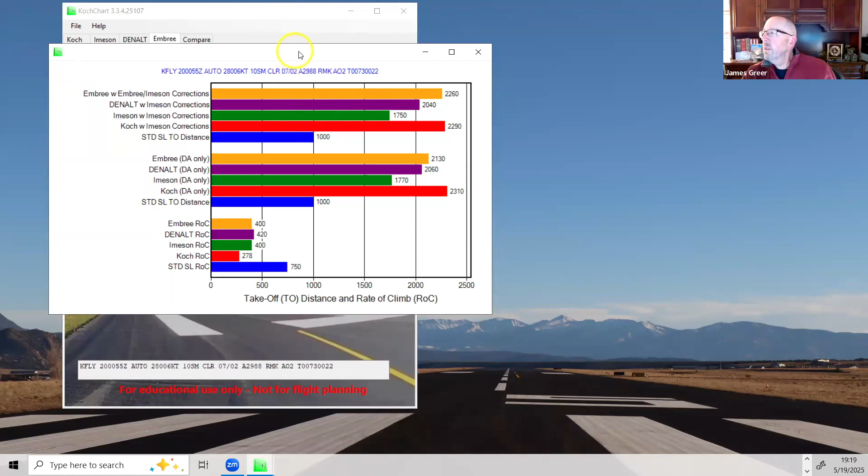So for the 4 methods we've discussed in this presentation, we've got our estimated takeoff distance and rate of climb. And the header on this chart tells us that this is for Meadow Lake Airport on this date and time.

The last tab is the Compare tab. That just takes those charts we were looking at earlier and draws a red vertical line at our particular density altitude. And that's from the Koch tab. The first thing we did was calculate density altitude, and we see that that's 7,700 feet. And the purpose of this chart is just to show you where the different estimation techniques fall for our particular conditions right now at 7,700 density altitude. This line moves depending on what you did on the very first tab.